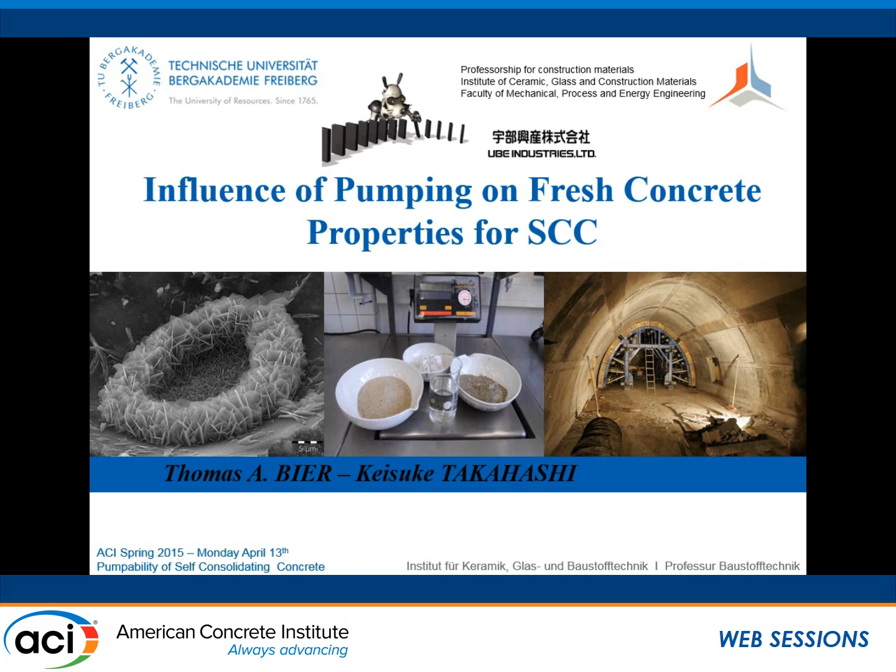Good afternoon. I'd like to present a study done over the last years by Keisuke Takahashi, who used to be a PhD student of mine and got his PhD last November on this subject. We were looking into how pumping affects the properties of self-compacting concrete.

We came to this because we had experiences about 8 to 10 years ago with pumping concrete. We did some field trials and also looked into literature to see changes in rheological properties of concrete. Based on this we designed our study, which was on a self-compacting mortar in order to measure some parameters which are difficult to measure on the concrete itself.

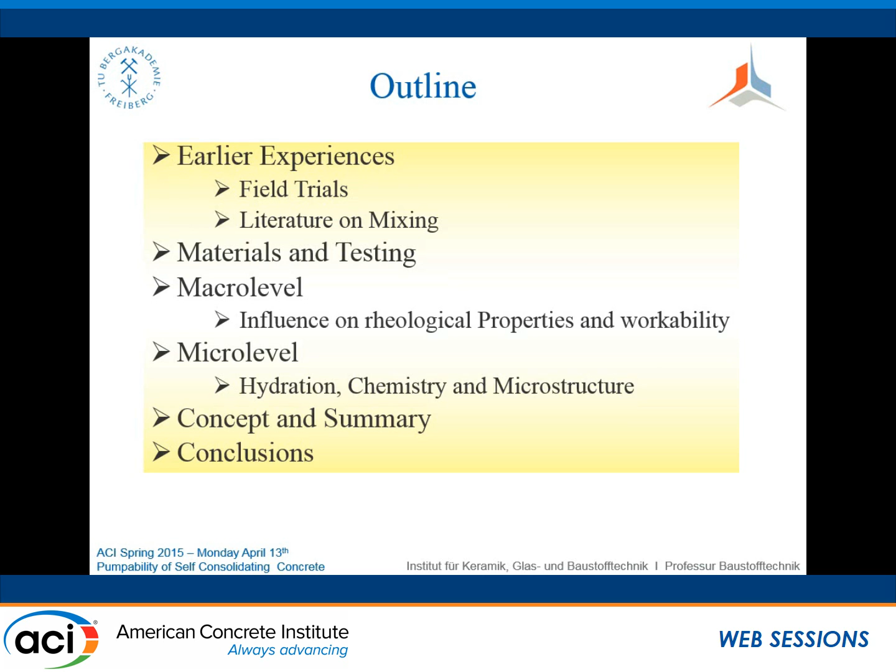We looked into two aspects. One is what I call the macro level, which is the technological properties, workability and rheological properties. The second is the micro level, where we see what happens to the cement particles and how hydration is affected by this pumping process. Then I'd like to present a concept as a summary.

But let's start with these field trials. I'm coming from a town in Germany called Freiberg, often confused with Freiburg, which is a very famous university. We are basically a mining university, and there we have the opportunity to work underground. There is still an old hard rock mine usable up to 150 meters down, and at this depth we excavated a void which corresponds a bit to an escape tunnel of the German railways.

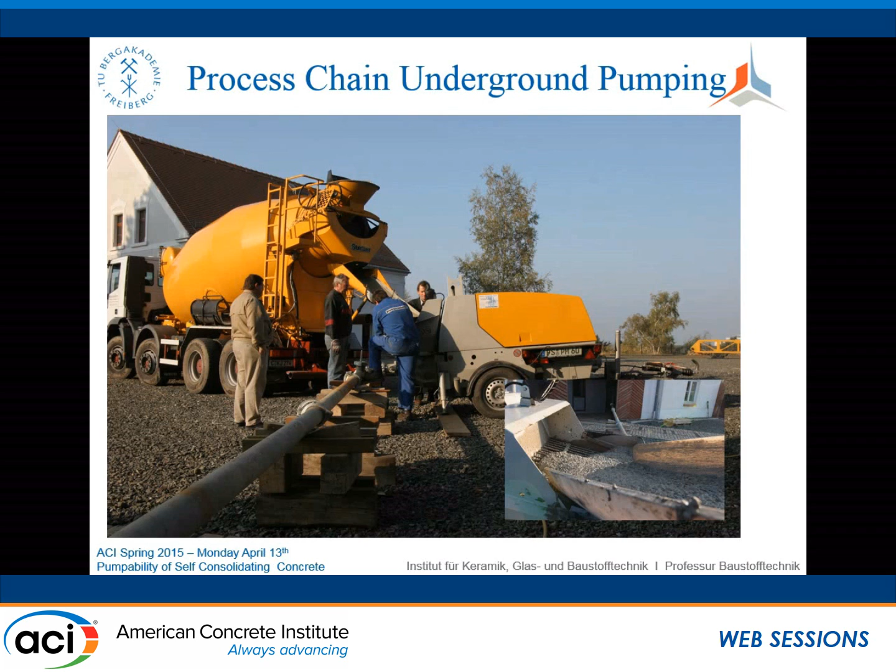In this void we pumped concrete in order to make the shell. You see here the concrete truck which comes, placed in a hopper of a pump, and then it's pumped underground. You see the construction site underground, the mold in the background, and here also a little bit this part where the concrete goes this 150 meters down in free fall.

Then it has to pass through an elbow, and then it's pumped another 70 meters to the site. We experienced problems, of course, with separation. We had also sometimes to take everything apart, which is not very nice if you are underground, but at least it's not hot there - average temperature 4 degrees centigrade constantly.

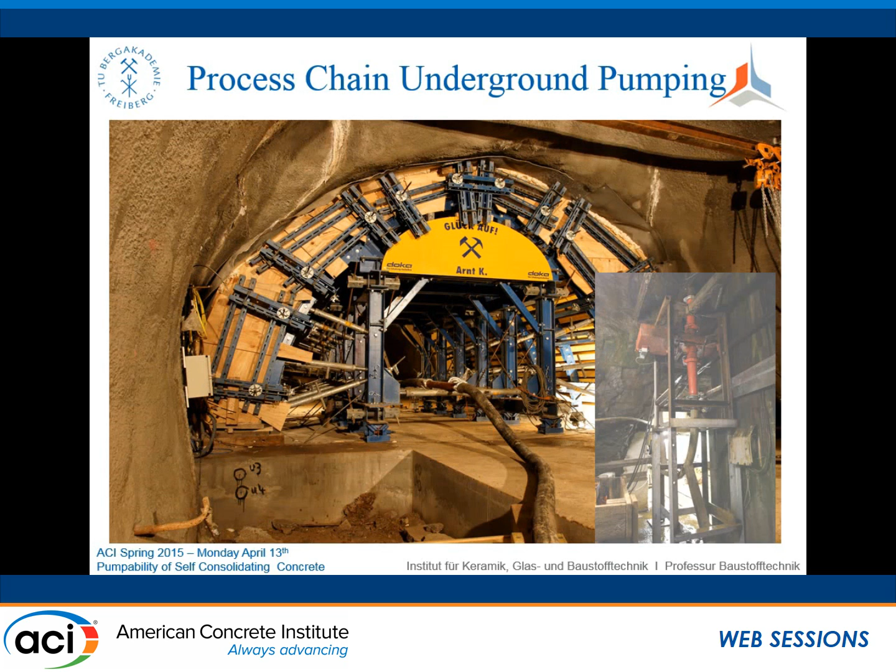We did some measurements, exactly what we saw before, but not on a large scale. We also qualified each truck which came in terms of slump and slump flow time. You see here values on mix designs based on an ordinary cement, a CEM I type, and a CEM II type, above ground and underground.

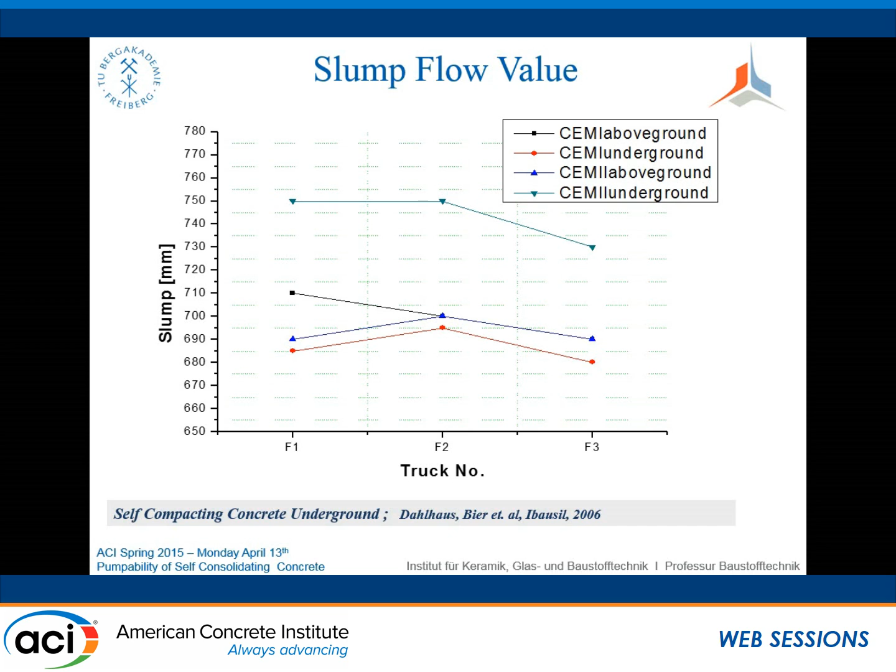For the above ground measurements, this is the black line. If we go underground, we had changes in the slump value. If we go to the CEM II cement, these changes were more pronounced.

The same we have for the slump time, or for the T50 time. There we saw, for example, a segregation, or at least something which we could qualify as a much faster passing through this V funnel, which is used to characterize this flow time.

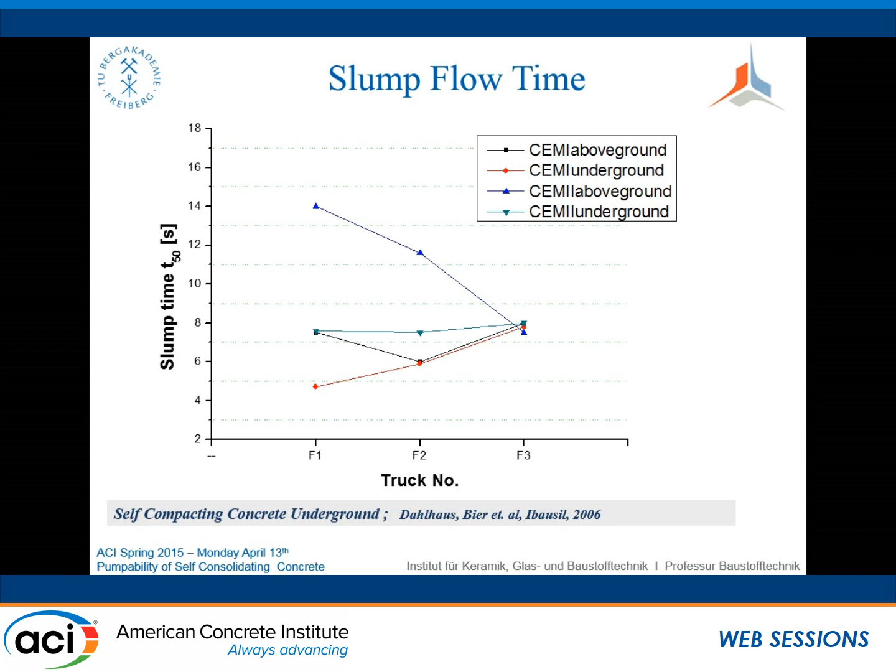Second thing was, if you look into literature, there have been publications, also presentations in this country, by Lowke and Schießl from Munich University. They looked into the effect of mixing self-compacting concrete with different speed and for different times, then qualifying it by the slump value, and you see the slump value can behave quite good.

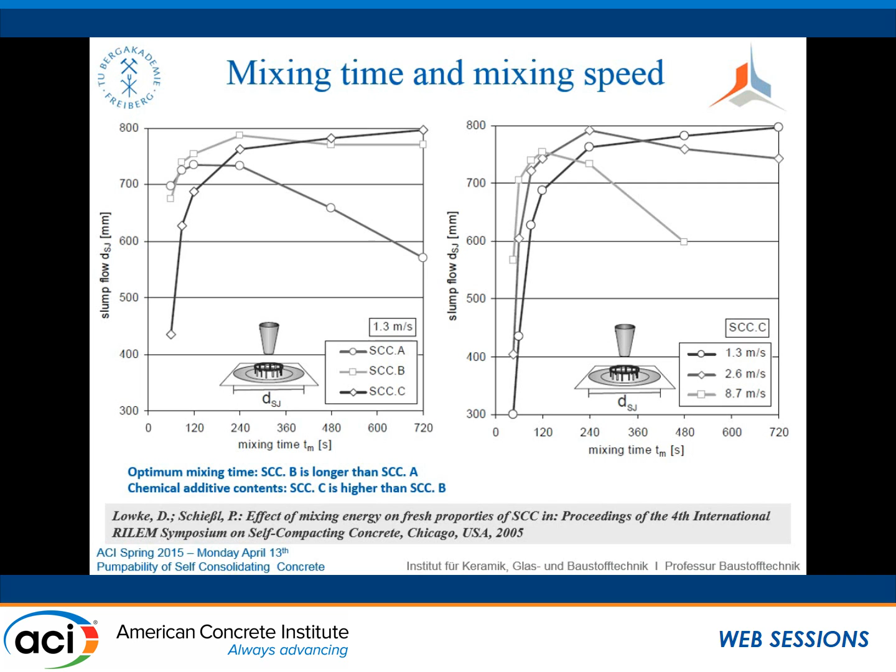It goes up in the beginning and then reaches a stable value, but sometimes you also experience situations where with increasing mixing time the slump goes down, or with constant mixing times but increasing rotational speed of your mixer, the slump would go down. So we looked into this situation, and the first question we asked is what is affecting these changes.

So we worked on a grout, a mortar, consisting of Portland cement, sand, plus a plasticizer, a PCE, and a stabilizer. This material corresponded to a real product sold by UBE Industries, and it also contained something additional for shrinkage compensation. These were pumped with a snake pump for various distances, and we also made trials in the laboratory where we were just mixing or pressurizing this mortar.

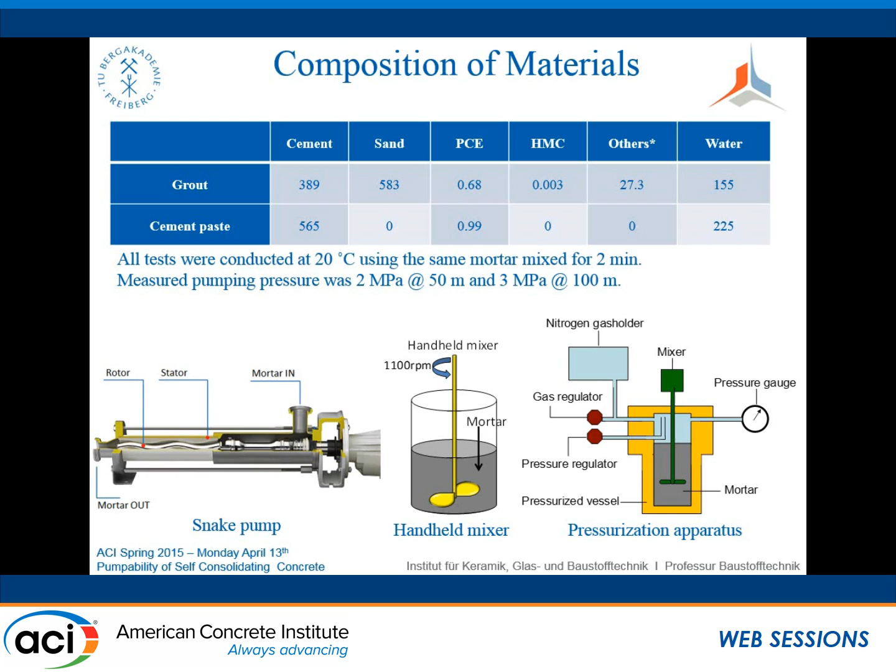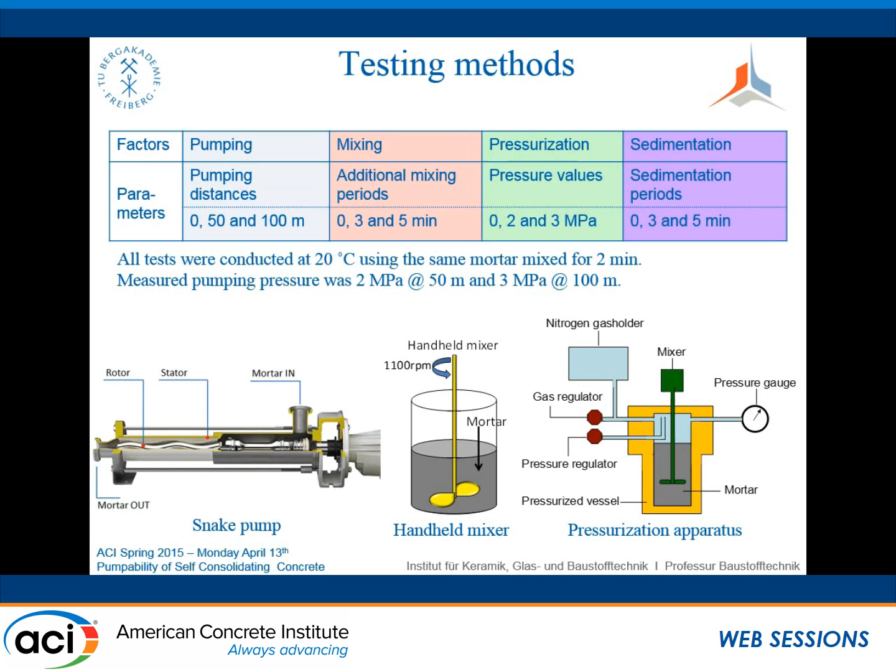We did this because we wanted to see the influence on changes in properties. You see here pumping, in this case, moderate distances of 50 or 100 meters. For mixing, we had a general mixing time of 2 minutes, but then extended it to 3 and 5 minutes additionally. We put it under pressure, 2 and 3 megapascals. We also looked into what happens if we let this mortar sit after mixing, for times corresponding to the additional mixing times we had.

If we do this, we can first measure the flow curves. We increase the shear rate to, in this case, 100, and then decrease it again. For the long pumping distances, if you compare here, this is the red curve, which corresponds to 7-minute mixing, 2 minutes plus these additional 5 minutes.

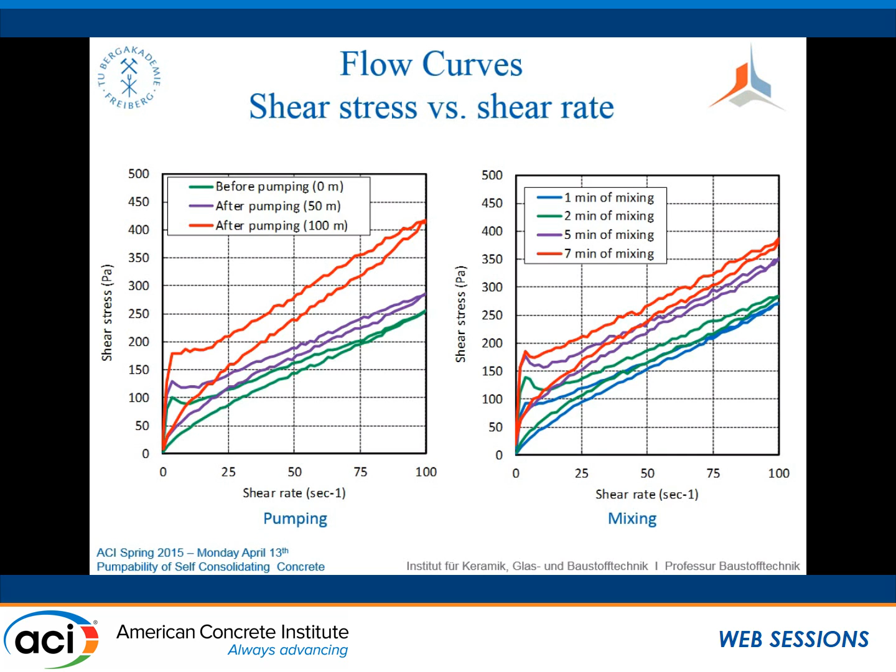We see similar effects on the rheological parameters of the material, and these results we depict in rheographs. This is shown in several publications in the literature by Wallevik. We took a reference point which we call 1 or 100%, and depict flow value as a function of flow time in the J14 funnel, according to Japanese standards, since Dr. Takahashi was doing this work, and we are calculating yield stress and plastic viscosity. Looking at this, we see that either mixing or pumping exerted the most pronounced effect.

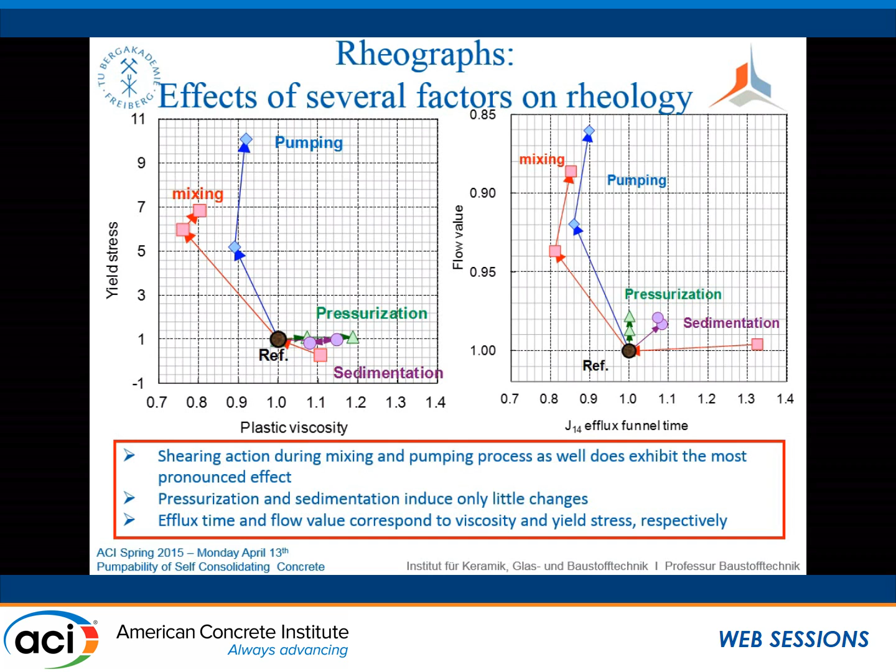The simple pressurization, or letting the material just sit, did not have the same pronounced effects. So from this point of view, we think that shear stress in a pipe, especially with different friction coefficients at the outside, or introduced by your mixing tool, by your paddle, changes somehow the rheological properties. The question is, what is this change?

Since we are at university, we try to understand what's happening in terms of hydration, in terms of chemical processes. Here you see first a general idea of hydration, used as a calorimetry curve. You measure the temperature as a function of time, and this is possible because it's an exothermal reaction. So if something is happening chemically, you will see it here.

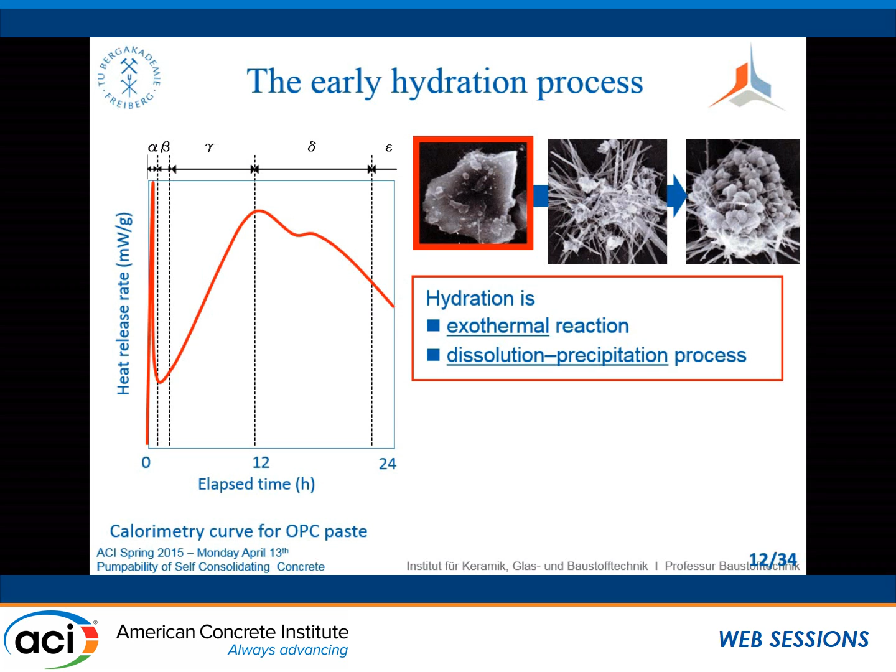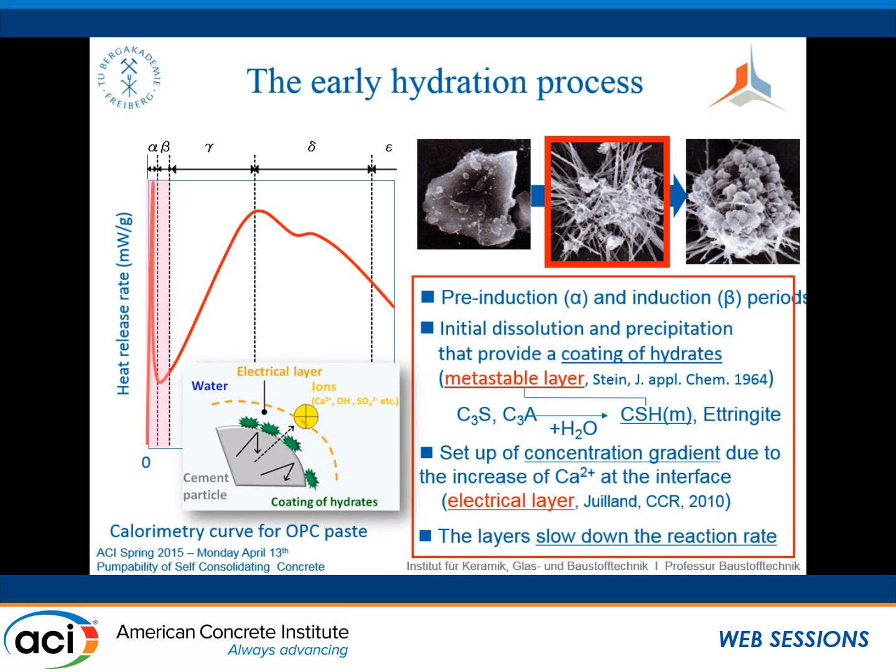The first thing you see is in this alpha and beta, which we call induction or pre-induction period. We have a dissolution of ions. These ions will increase or change the concentration around the cement particles—that's one thing. The second thing is it will already start to make prehydrates or precursors, shown as these small green dots. There are two theories here, and sometimes people fight each other, saying one theory is right or the other one is right. Probably both mechanisms should be taken into account.

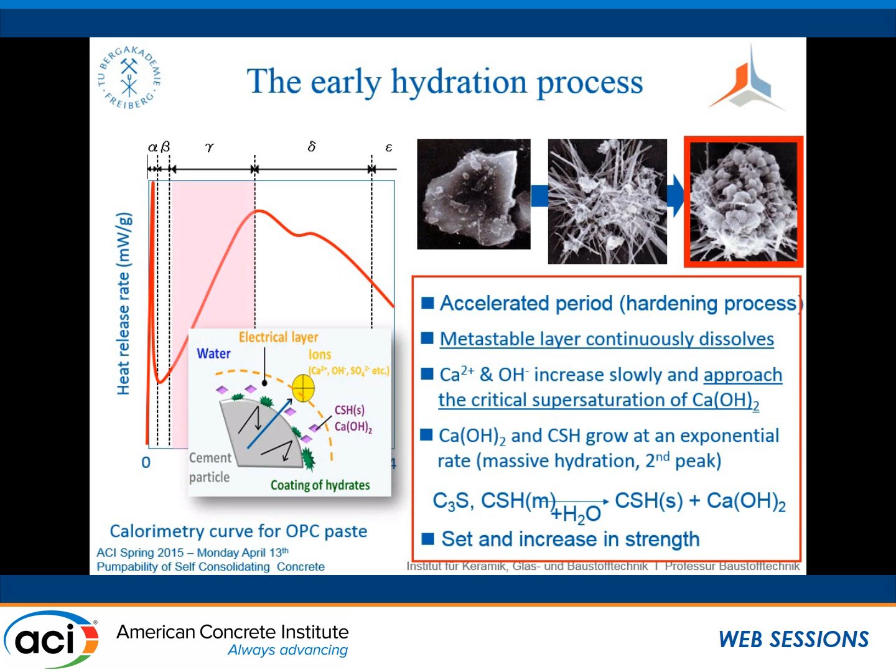After this constellation, which happens in the first 2 or 3 minutes, then you get some time—here you see as an example up to 12 hours. During this time, the prehydrates will go over to real hydrates. Calcium hydroxide will also be deposited or nucleate in this area, because you have a critical saturation or supersaturation of calcium in your solution. At the same time, you see these needle-like crystals. They will interlock, and you have as a technological property the end of workability and the increase in mechanical strength.

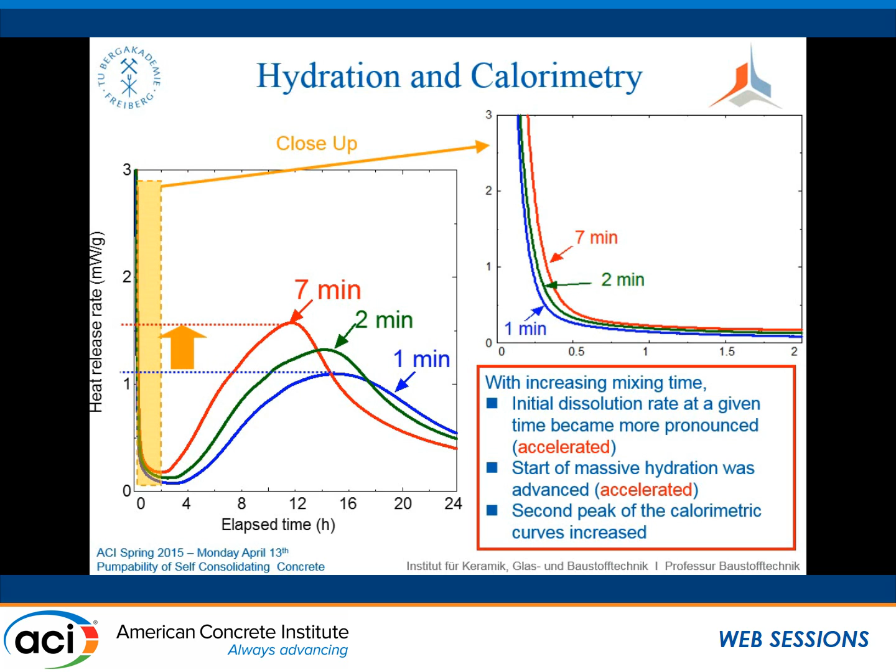So we really see we change not only the state of dispersion, but we also change the hydration—we change the kinetics, if you allow me this expression, of hydration.

And then we had a third point. There we were looking at what happens with our superplasticizer, our PCE. So we measured the concentration or the amount of superplasticizer. This is basically the black curves, or this black axis, in milligrams per gram in the solution.

We measured as well the specific surface area as a BET surface area of the particles which were in the solution, so it was basically centrifuged and still in the wet or liquid state. And on these particles we measured the specific surface area, and then we calculated the amount of PCE per unit of specific surface area to get an idea how much superplasticizer could have been adsorbed.

And then we see basically the specific surface area increases, and we see this here as a function of the mixing time. So the longer we mix, the higher our surface area, indication that we create more hydrates, and also the higher the adsorption of PCE, but per unit area of these hydrates formed, it decreases. So we might end up with not enough superplasticizer available to adsorb and to cause the dispersion.

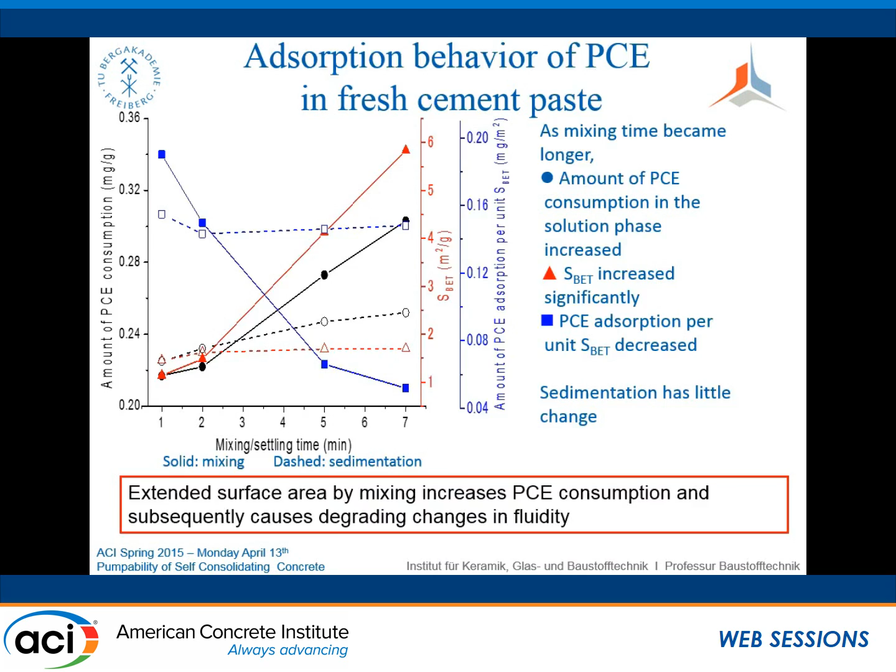We did, by the way, but I could not show it here, a super dosage of PCE, and then this effect is not as pronounced. So we basically think what's happening is the following.

We have a self-compacting mortar or a self-compacting concrete, we add these plasticizers in order to reduce water, but also in order to get a good workability. And this superplasticizer will adsorb on the surfaces, and in this case, with a steric interaction, will allow a dispersion of the particles. Now we mix more, so we shear off particles, or we change the concentration of our solution around the cement particles.

But these particles have already adsorbed this superplasticizer, so they are sheared off or scraped off, and they still have the superplasticizer on top. These small green, how to call it, spiky things with the superplasticizer on it.

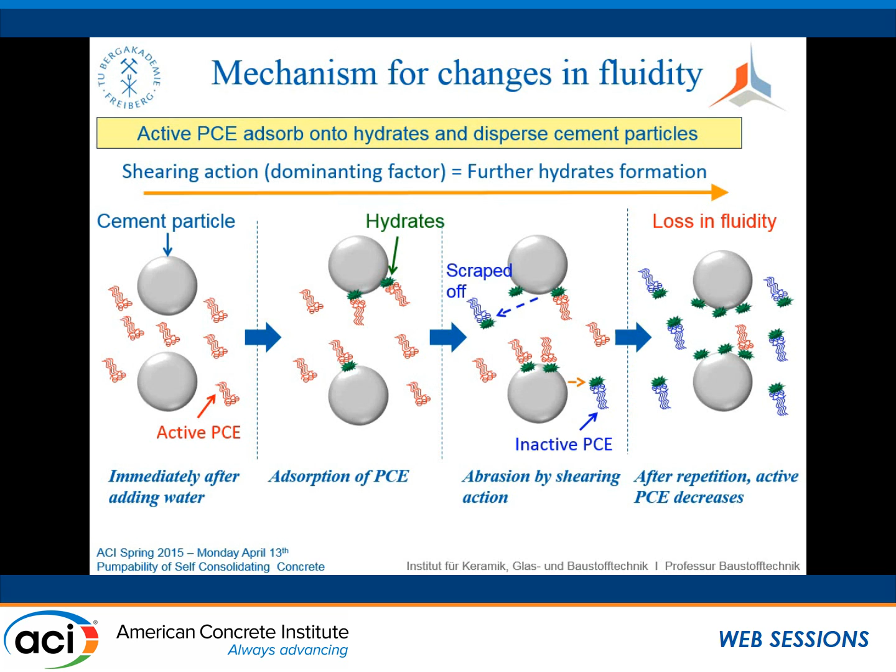Now it turns from red to blue, which means it became inactive for the dispersion of the particles. And as we go on with this process, with a long mixing period or with long pumping distances, then there will not be enough active PCE in the solution, and in the end we will measure a decrease in dispersion or in rheological properties.

So to summarize this a little bit, we started off by observing either when we were mixing or when we were pumping. When we were mixing for long times, or over mixing, when we were pumping for long distances, then we saw that we have first a dispersion of the particles, which means good workability, but at one point in time we have negative effects, which we think might be a destruction of superficial layers.

Which was the idea we had in earlier investigations. So we looked on a micro level into hydration kinetics, the adsorption of PCE on the surfaces, and also the microstructural development, which I unfortunately could not present here.

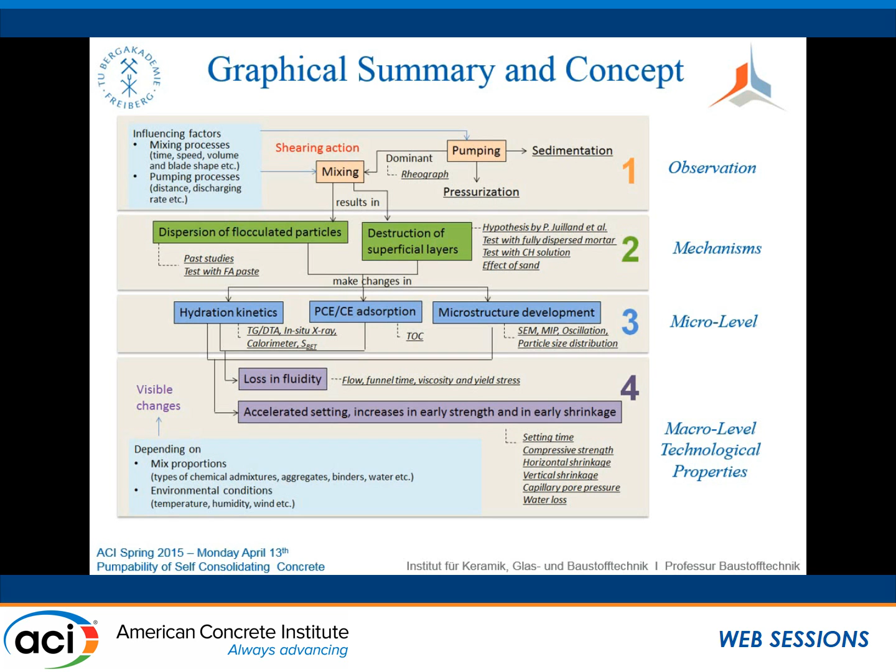And as a consequence, we have a loss in fluidity, and we also have an accelerated hydration. So we measure, for example, also higher short-term strengths. We also would measure an increase in temperature, and we also would measure a change in early shrinkage.

So this extended mixing or pumping means that our rheological properties decrease, yield stress, flow value, and viscosity and the efflux time increase. If we use the Rheographs, then we think that we come to this point that the shear stress is major responsible, or in majority responsible for this phenomena.

And on a microstructural level this leads to the consumption of active PCE, which is in solution and which can adsorb on the surfaces, and the surfaces, however, they increase by this accelerated hydration, and subsequently we have a decrease in PCE which is adsorbed on these surfaces.

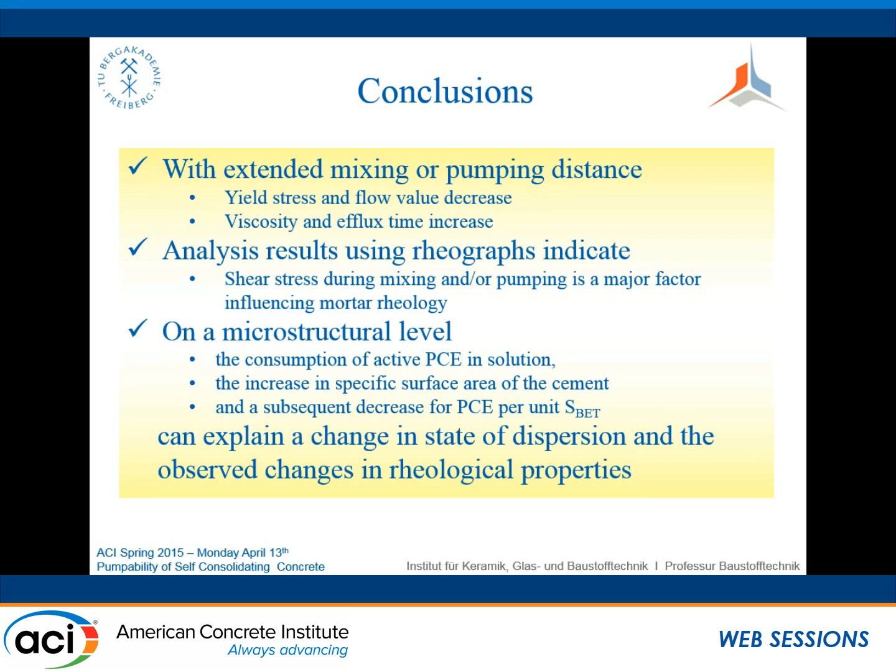And this explains a little bit that we have different states of dispersion as we go along in time during mixing. And I thank you very much for your attention.